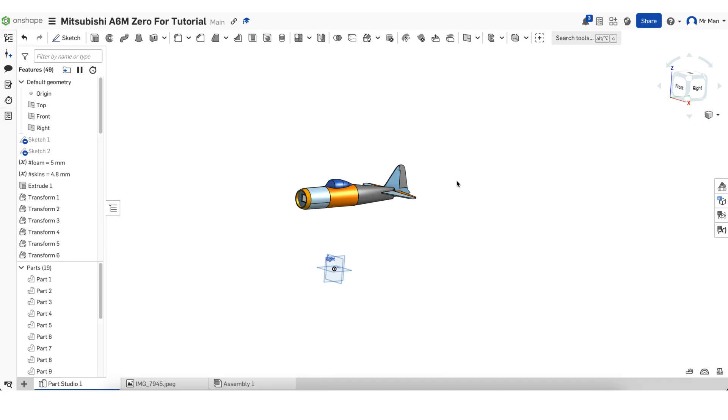Alright, so we're just going to start with that, make a sketch, choose the right plane, and start making the airfoil. We're just going to make a corner rectangle, and try to make the bottom plate of the skin, basically. That looks about right, 5 millimeters thick.

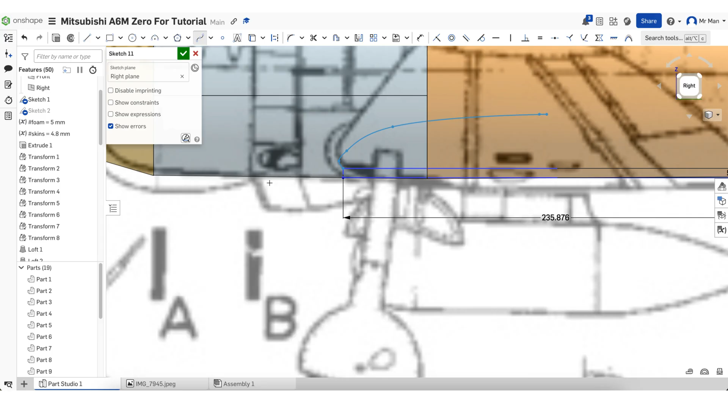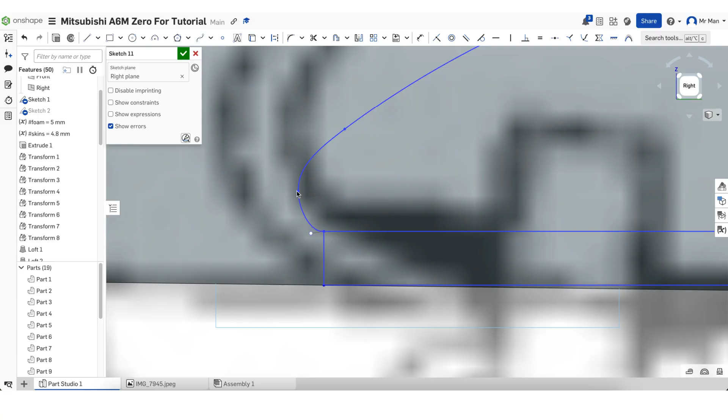And now we gotta start making the airfoil. When you drag it past, do not let it connect to the bottom plate we made. I'm just trying to get the overall shape, try to get a decent airfoil. It doesn't have to be perfect, but you want it to be close.

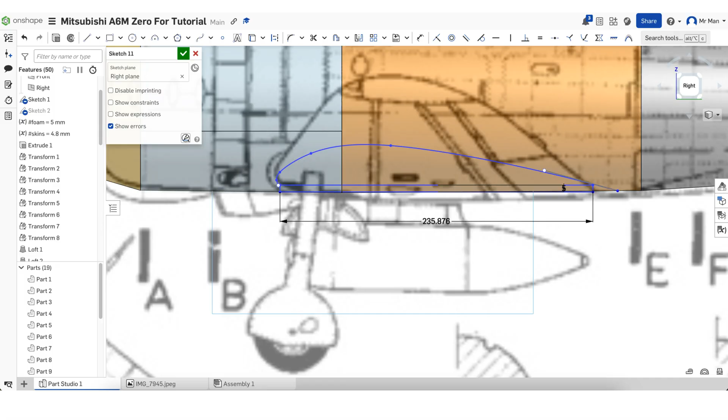Now we're going to make a construction line just to check how thick the airfoil is. That looks about good. Let's do an offset, bring it out 5 millimeters. Bam.

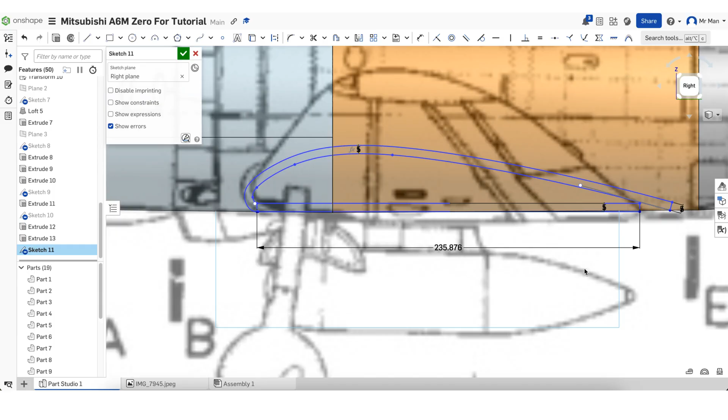Just gonna make a line and join up this back bit. There we go. Let's delete this line.

And try to join these because they're way off right now. Try to find any constraints and delete them. We want them to join, but we may have to just get them close and use a line to connect them.

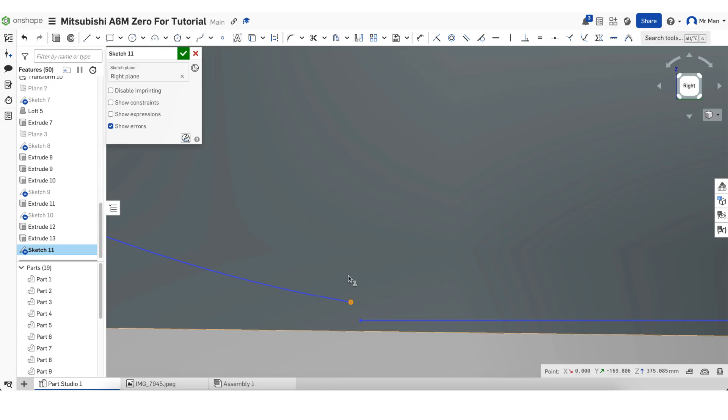I'm not an expert, I'm a human, so of course I make mistakes every now and then, but we're just going to join it with a line. Okay.

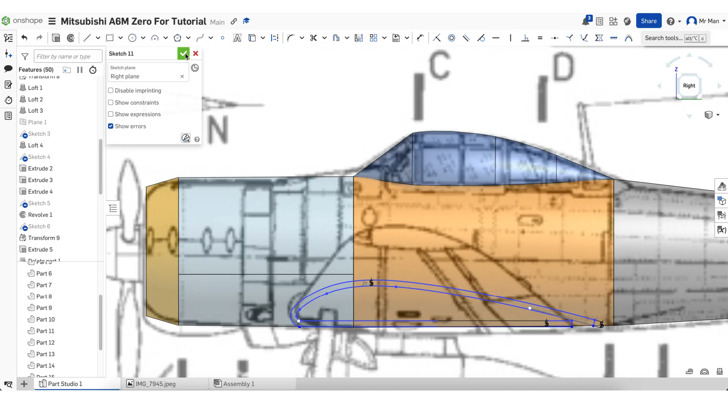Now we're going to make an offset plane. Choose the right plane. And now, since our wingspan is 1200, we're going to set this to 600 because that'd be half of the wing, and that's what we're doing right now.

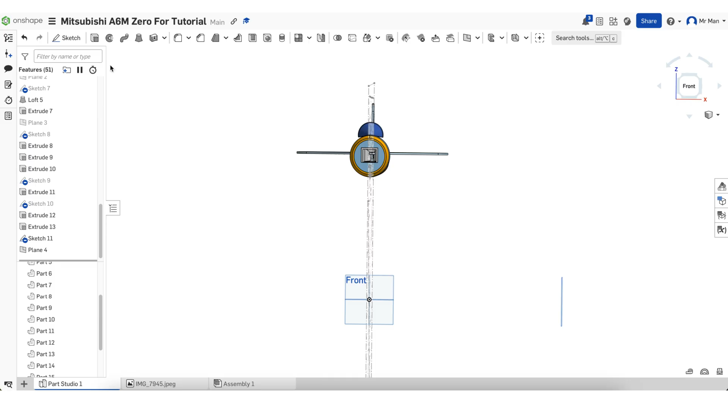We're going to try to grab all these lines, right click it, hit use. There, now we have this bit. So basically we have that sketch, but now on this plane that's 600 millimeters apart.

So we're going to select everything. We just want the main, because we're going to do an offset for the foam thickness. So we just want the internal structure basically, so it's the same airfoil throughout. Hit transform.

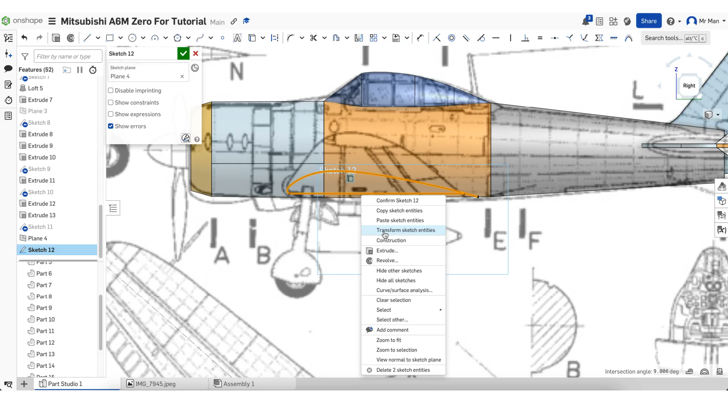And let's scale it down quite a bit. This is going to be for the wingtip. We're lofting from the wing root to the wingtip. That looks close. Hit offset.

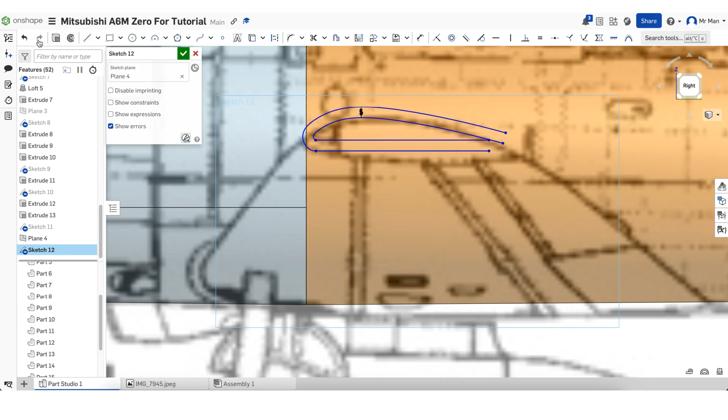Select the two lines, click and hit 5 millimeters. Perfect. Now let's grab the line tool and join the ends. Finish sketch. Perfect.

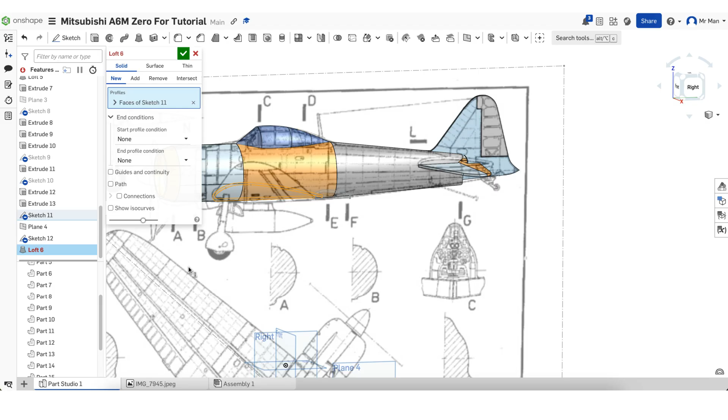Now let's go to the loft tool. Make sure it's in solid. Now choose the profiles, I'm just gonna hit sketch 11 to sketch 12. And it's giving us an error.

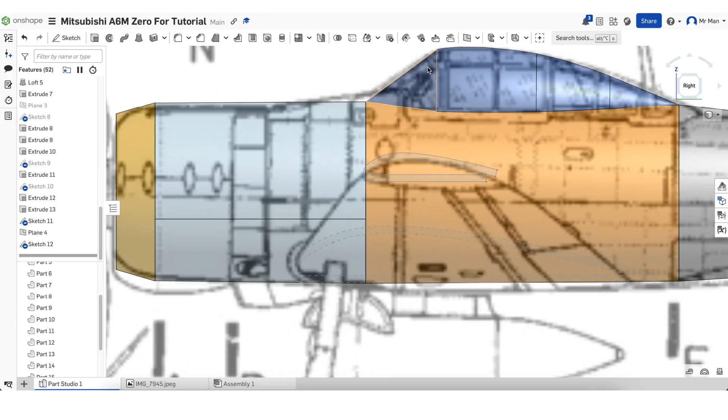I'm not 100% sure why it's failing, but let's just try again, change a couple things. Go to sketch 11, and let's do things a little differently this time.

So now we just got the main airfoil. Just try to delete that line. Okay, yeah, so now we've got the airfoil.

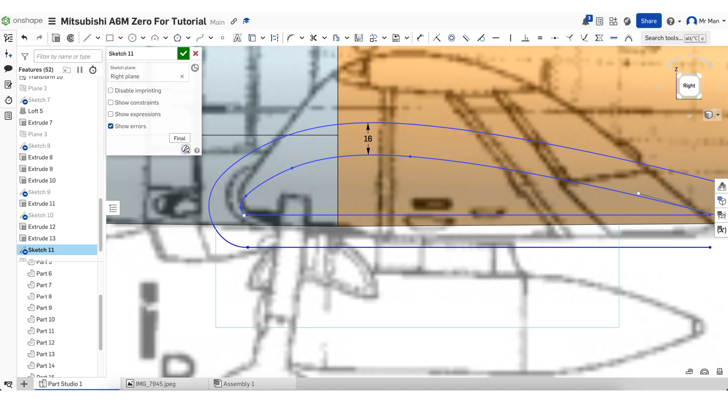I'm just going to offset the airfoil. Set it to 5. Just like that. Hit the line tool.

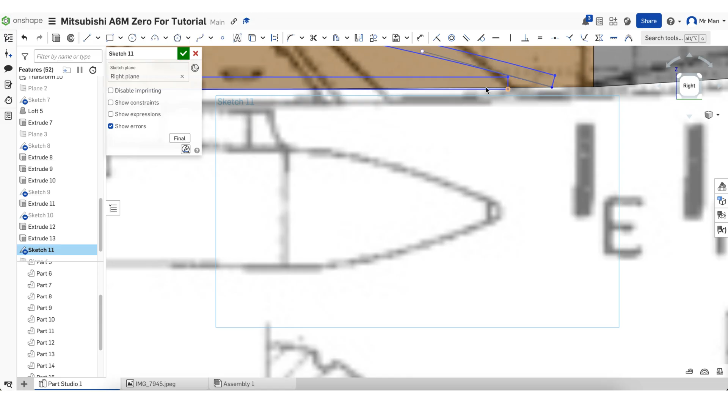And see if this will work better than it did last time. Alright, close that end. Perfect. Alright, let's see if this will work.

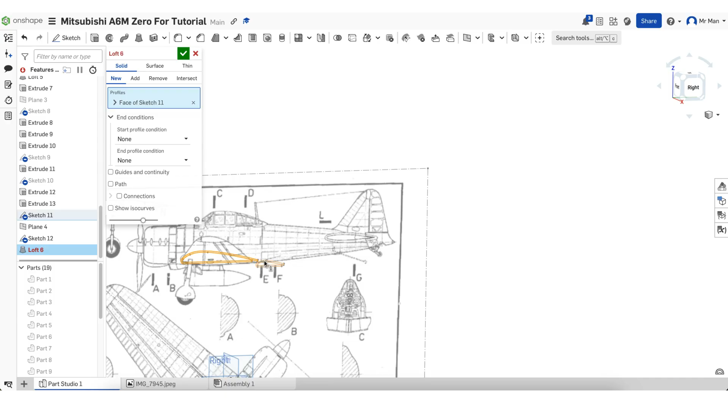Making sure that's all one solid body. Perfect. Let's loft again, make sure it's solid, and select the profiles. And there we go. This time it worked. It's perfect.

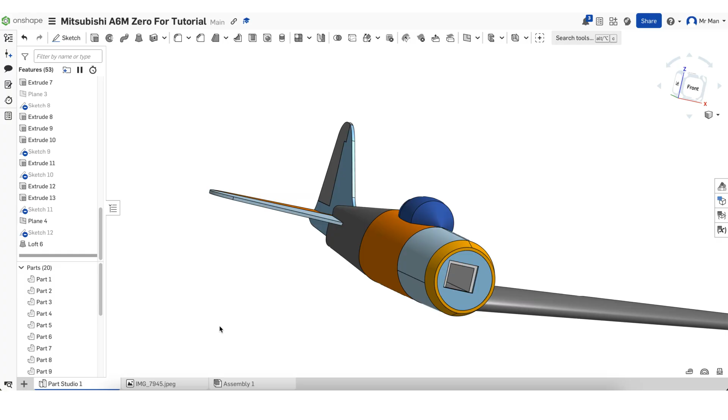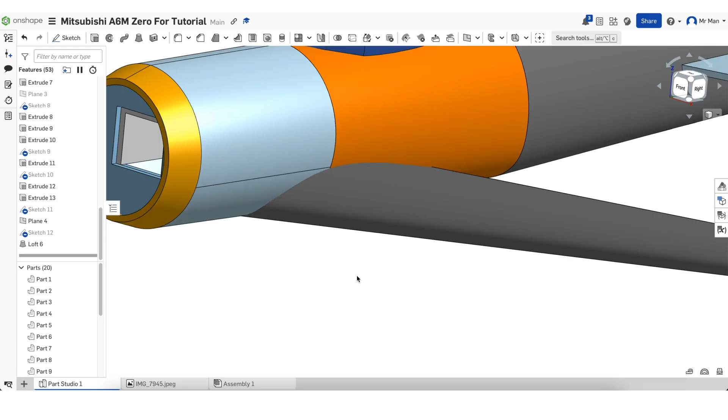And as you can see, now we have a wing half. That looks pretty good. Yeah, it looks really good.

You can see that's where the 45-degree bevels will be on that line. Okay, let's just bring back this top view sketch and let's check the wing and see how it looks.

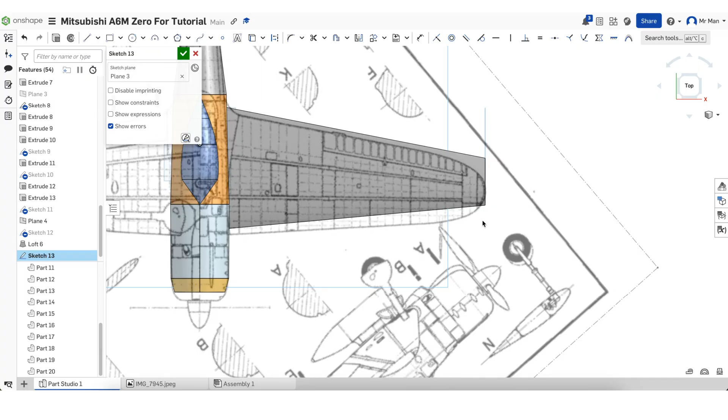Try to get the curved shape on the wingtip. As you can see, it's a little far back. I want to bring that tip forwards a little bit. It's like swept.

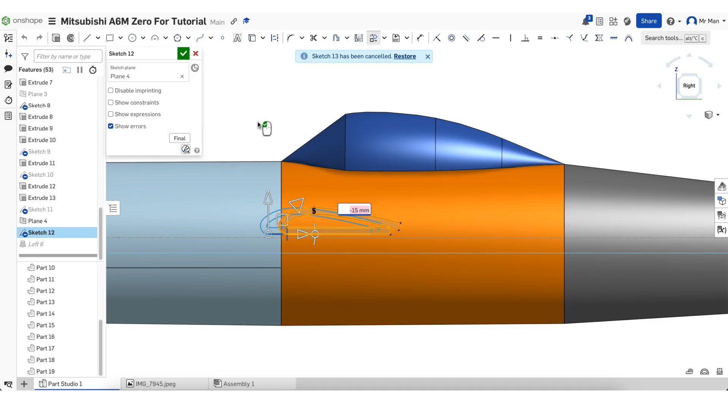Swept back too much, so we're just going to go into sketch 12. Hit transform and move it forward a little bit. Perfect. Alright, let's see how that looks.

Let's go to top view, and there. It's not perfect, but it's much better. Not anything you'd really notice when building with foam or anything like that. So that'll work. You can do sketch.

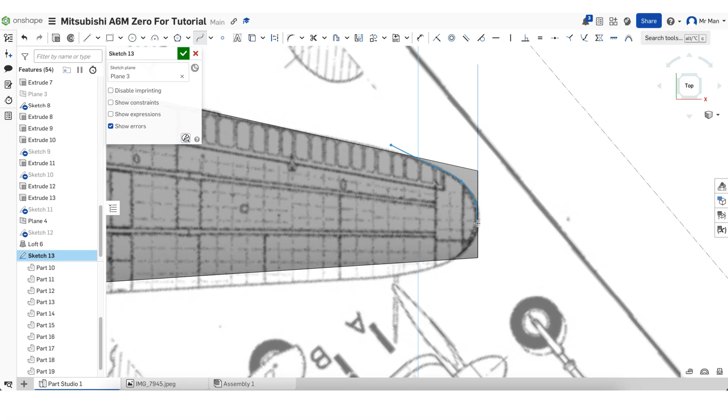Let's choose spline, and let's cut the wing to give it this rounded wingtip instead of a straight wingtip like it's got right now. Just work our way all the way around, using the canvas as a guide. Choose line, and just go around it to close it off. Perfect.

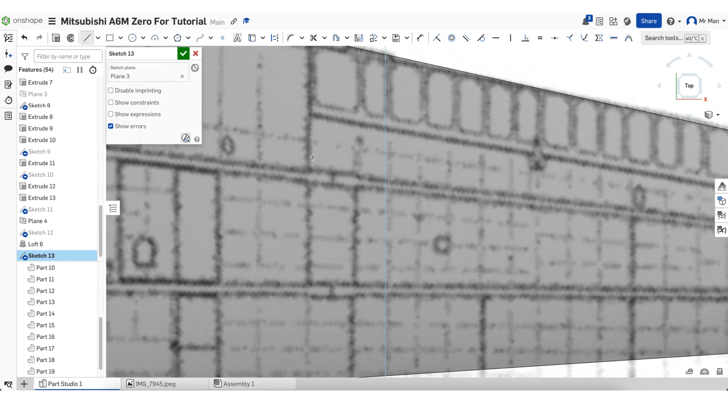Alright, now grab the line tool. Let's start making an aileron. Once again, using the canvas as a baseline for reference. And just carry it to the edge of that, and that'll work. Alright, finish sketch.

And let's go ahead and hide this canvas. Okay, now let's extrude, and then let's start with this wingtip. Symmetric. Remove.

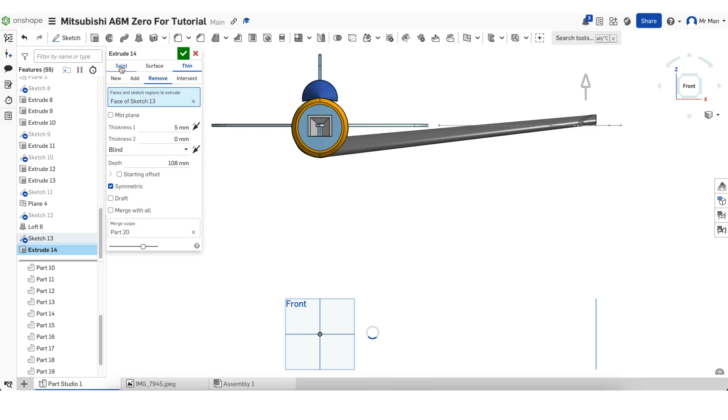And we're on thin, we need to change it to solid. Make sure you're on solid. Alright, let's reselect that. And that looks pretty good. As you can see, it cuts it to a rounded wingtip.

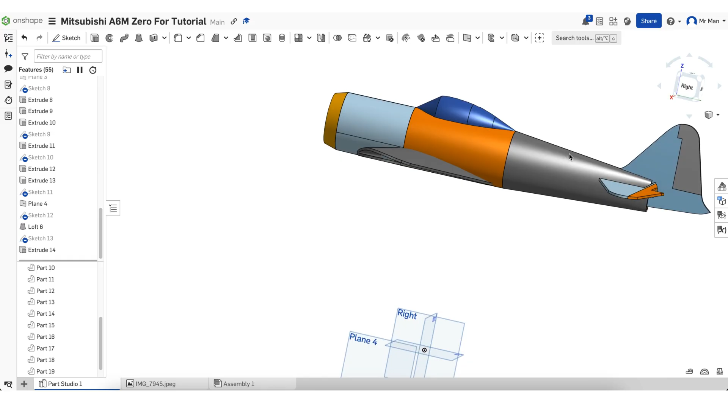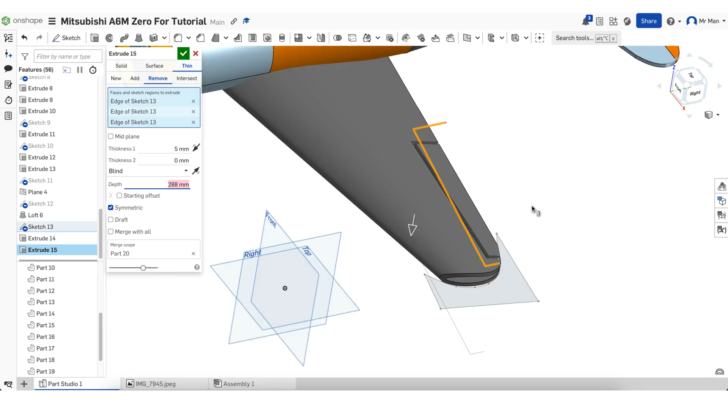Now I'm going to bring that sketch back, hit extrude, make sure we're in thin, and select these lines we made for cutting out the aileron. Make sure it's in remove, symmetric, make sure it cuts all the way through, and then let's choose thickness to be 0.01.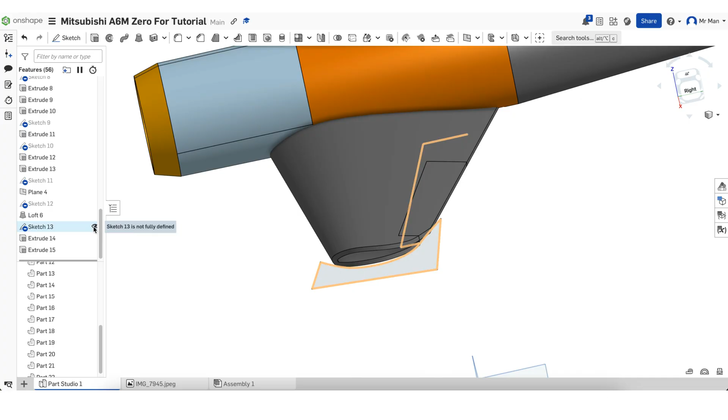Perfect, okay, now we've got our aileron. We can hide that sketch now. Let's go to the bottom and delete this little piece right here because we do not need it, because the aileron is one single piece of foam. It's not double layered, just single layered.

Okay, we're going to try to cut the bottom. Great, well, just a tiny amount of undercamber. It's not necessary, it makes it easier to build, and it flies a little gentler. Now let's just pick the top plane.

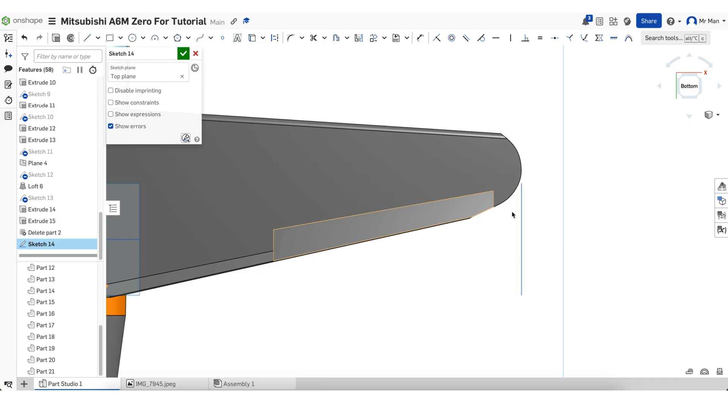Just hide plane 4, make it easier. And let's grab a line and let's just cut it off right at the edge of the aileron. Just make a line and drag the box around it.

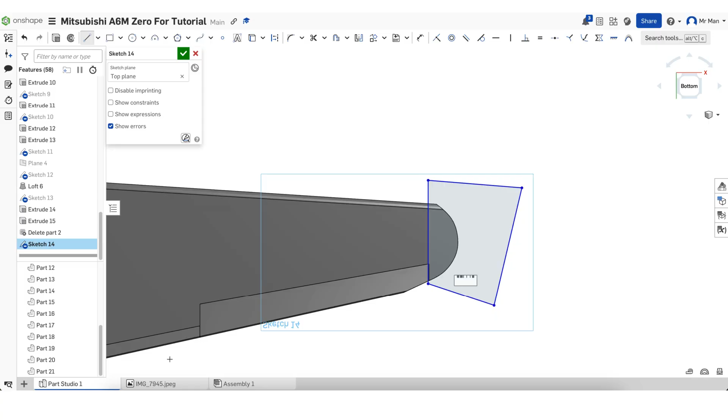Now we'll cut this bit out right here. That way the aileron has more room. When you fold it over, it's not gonna be the same every time, so you want a little bit of buffer, so to speak, and that's what we're making right now. It's that buffer.

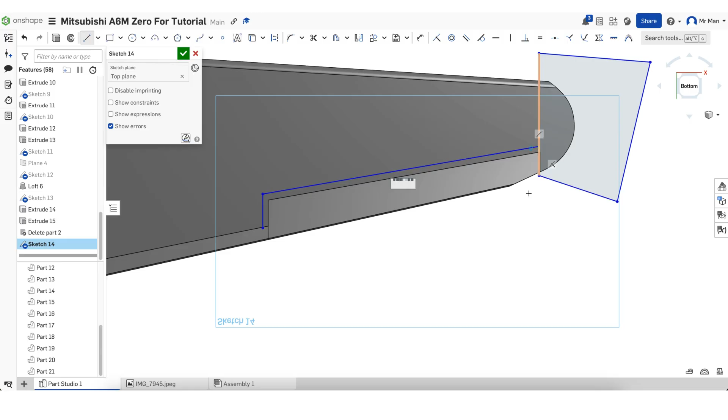Just connect it there. You don't need to make it fancy. You could just draw the line straight over, but I'm just gonna make it like an L shape. Go, finish sketch, hit extrude.

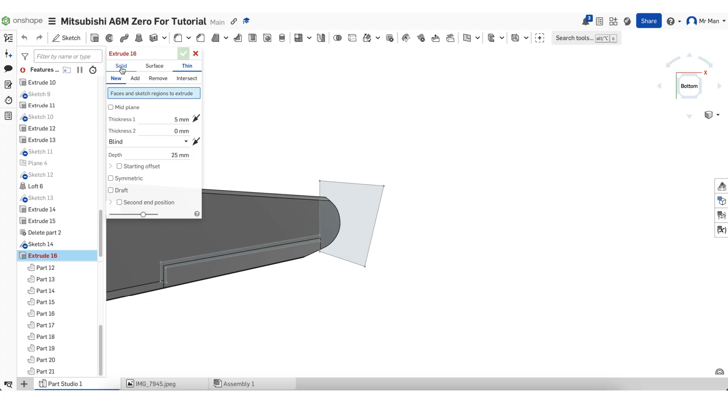Click solid, and choose this, the part for cutting out the undercamber. Hit remove and bring it up. Let's select a merge scope.

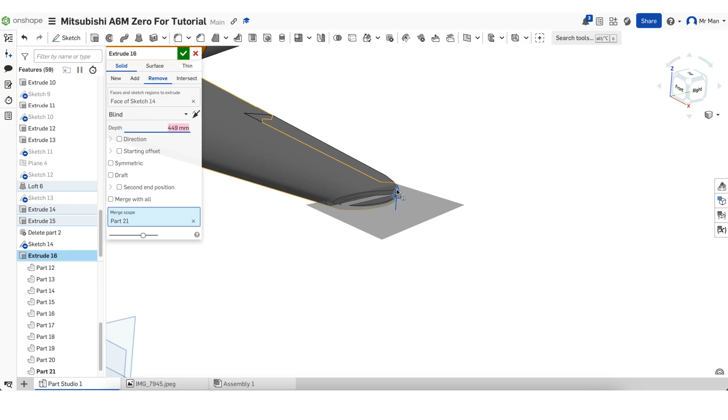Okay, now let's bring it down because we still want the top to have the full rounded wingtip. We just want to cut out the bottom. A little more up. Okay, there, that looks good.

Now you see we got that little piece still hanging off, so we can just go to delete part, select that little floating piece. Okay, gone. As you can see there, we have an undercambered wingtip.

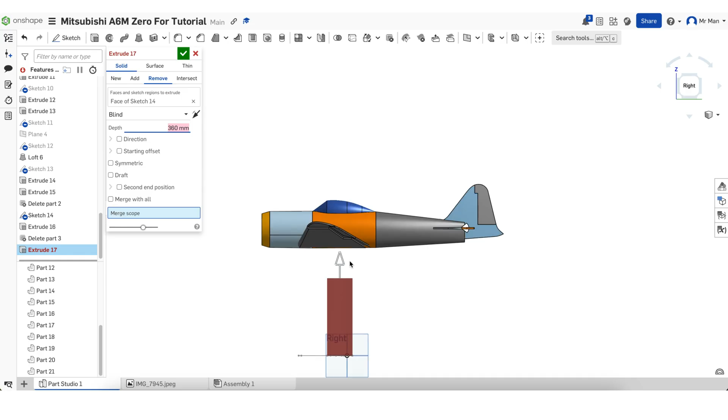Go to extrude, let's bring that sketch back. Now let's select that L piece. Oop, forgot to hit remove. Select our merge scope. Bring it down until it stops.

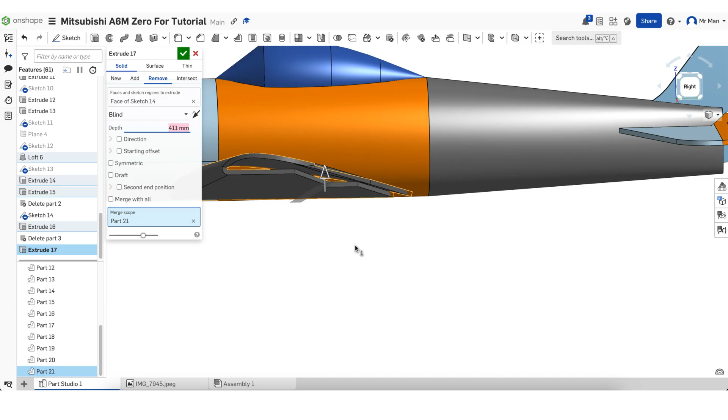See, we got a problem. It only cuts part way because of the dihedral, it's at an angle. So we're just gonna X that out because we can always go back in 2D after we're done designing this plane and cut that out. It'll be just fine. It's pretty simple to do, and it's not 100% necessary either.

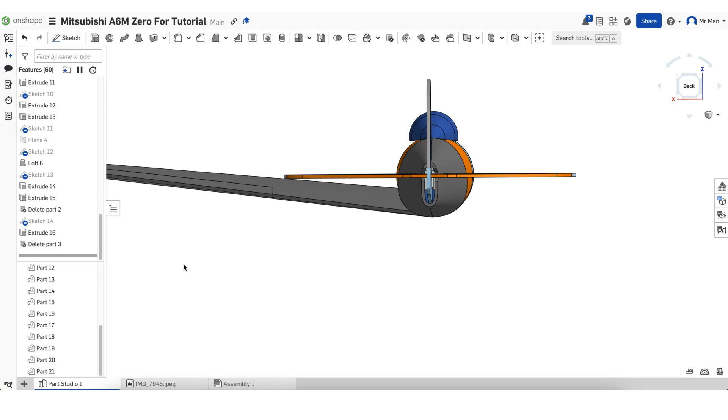Alright, that's looking pretty good. It's looking very good. Now we need to make, yeah, that looks good.

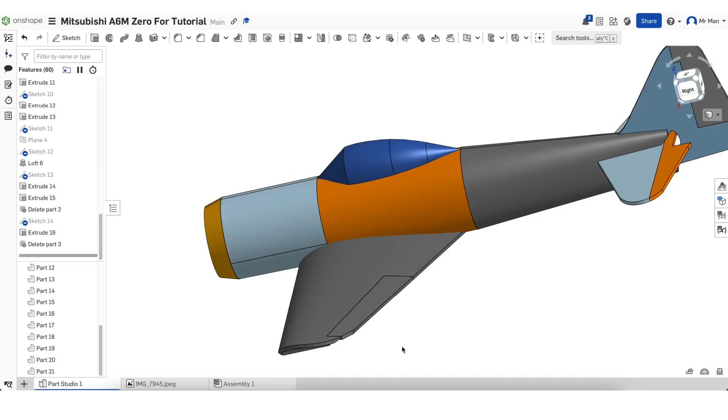Okay, let's just mirror the other side so you can get an idea of what it looks like. Select the aileron and the main wing body. Select a mirror plane, in this case it's the right plane. And boom, there we go. We got the whole wing.

That looks pretty good. As you can see, it follows the path of a normal A6M Zero wing pretty well. Looks pretty scale.

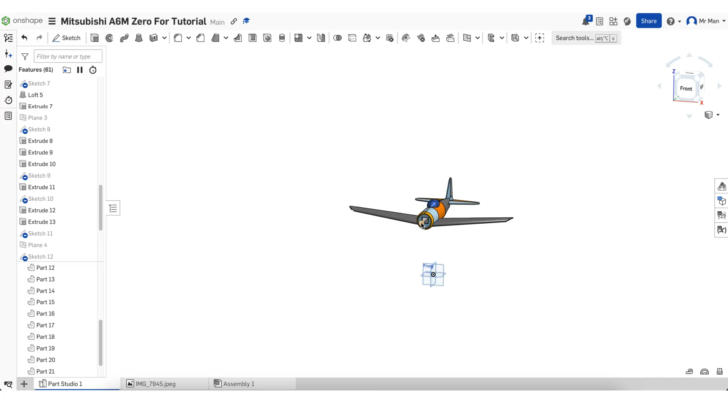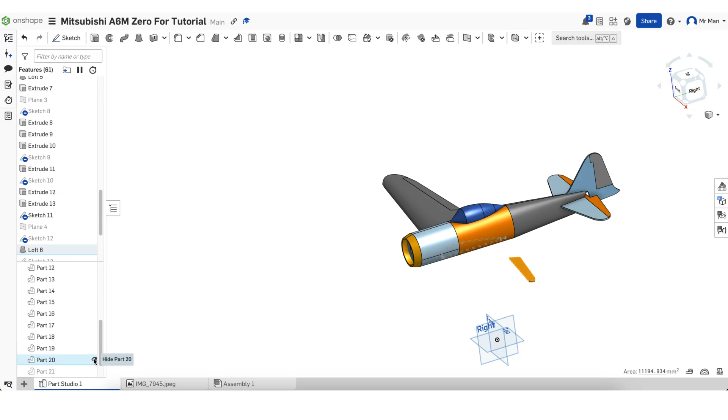Let's hide this piece, and let's bring back sketch 11. Alright, let's hide the wing. Make a new sketch, choose the right plane. And let's select the outside curve. Hit use, and do the same with the bottom line.

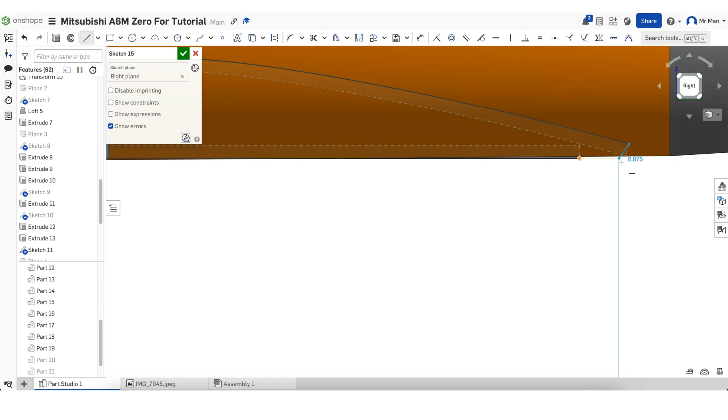Perfect. So now we gotta join it all together, so let's just make a line. We want to make it parallel. Alright, perfect, drag it over.

There, now it's one solid piece. Finish sketch. And let's go hide sketch 11 and let's, whoop, not sketch, extrude, and extrude sketch 15.

Make sure it's in solid, hit remove, symmetric. Let's drag it out, and let's select our merge scope. Yeah, that looks right enough. Alright.

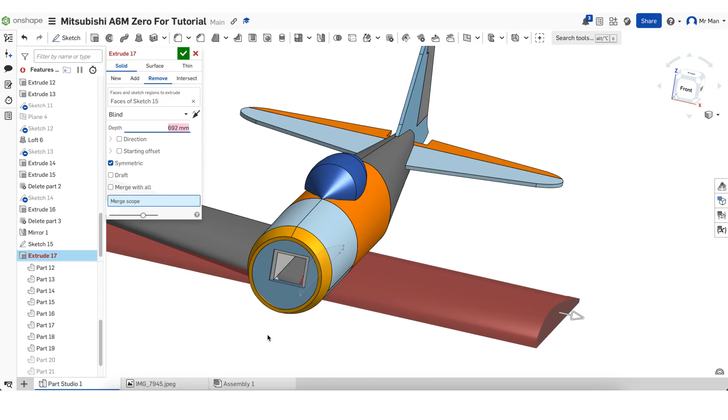Not that skin, but this skin and the hatch skin. Perfect, comes out on both sides. Finish sketch.

Okay, now we will want to delete these bottom pieces because we won't want them. Let's delete that one, the other one is still joined. We got to go fix that. But first, let's...

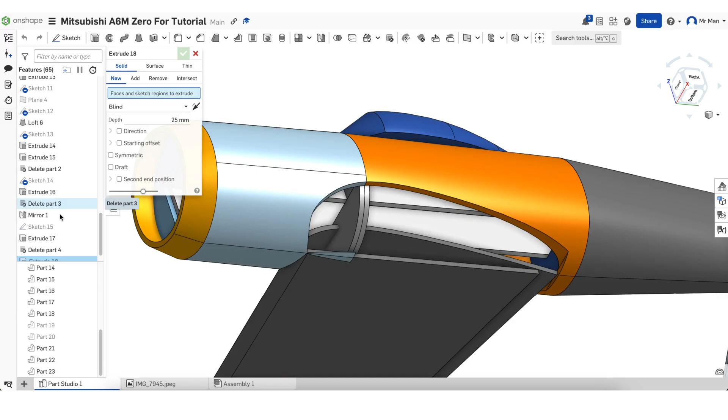Cut out these formers. Same sketch, hit remove, pull it out, and select a merge scope, which we want to be both of these formers. Alright, finish extrude, and there we go.

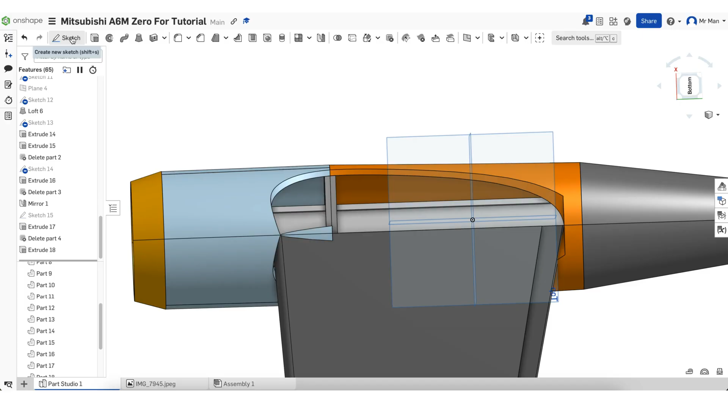Alright, let's make a sketch. Choose the top plane, and let's just make a little line. Just hide, just bring the other wing back, and let's zoom in on this.

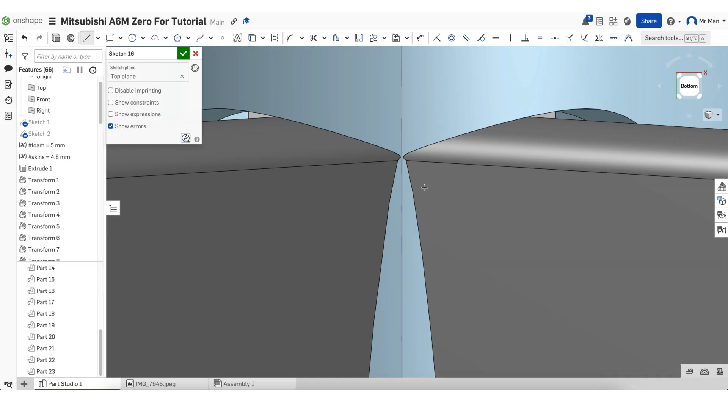So we just want to cut it basically, so we're just going to make a line, bring it across. Again, that's perfect, just make sure it's perfectly horizontal. Finish sketch, hit extrude, make sure it's on thin, and select that line.

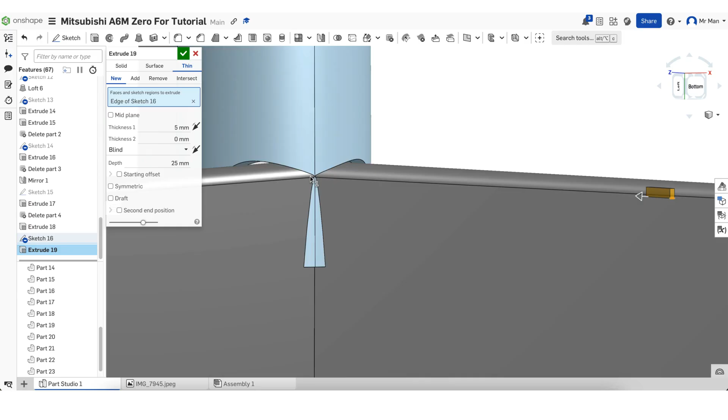Now it is 5mm thick. That's why it looks like it's extruding in the wrong direction. Let's set the thickness to 0.01. Make sure it's on remove.

And bring it up. Looks pretty good, that'll work. Now select our merge scope. And it's cutting right through that little line right there.

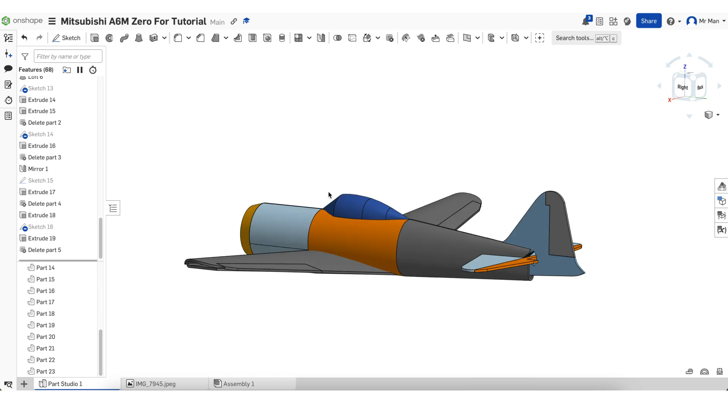Perfect, now we're going to delete part and select this piece. Bingo. So now we've got the slot basically - not really a slot, but now the wing will fit in. It's formed to the shape of the wing is what I meant by that. That's nice, so the wing.

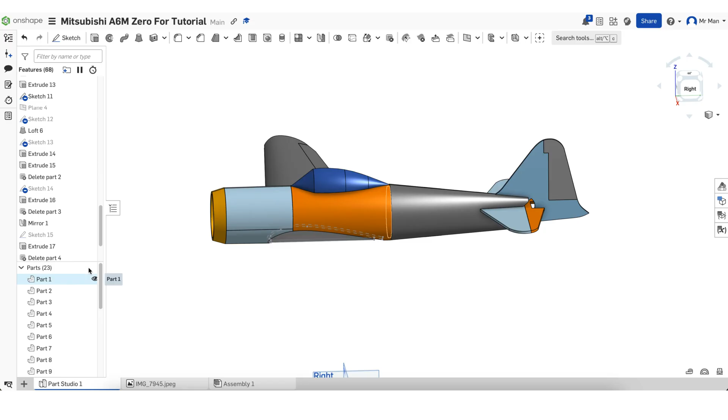Let's bring back sketch 12, and let's bring back sketch 11 first. Make a new sketch. Just hide all the whole plane, it'll make a whole lot easier to work with. Alright, make a new sketch.

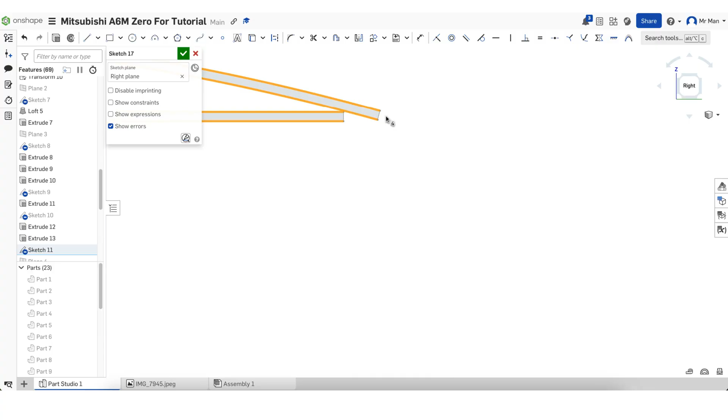Alright, for some reason that doesn't work. Let's just select all the lines. We don't need those, we're just using this for reference. So, use. Perfect, now let's make

A corner rectangle. Let's bring it close to the highest point. Bring it down to the bottom. And let's change this dimension to 5mm. Just like that.

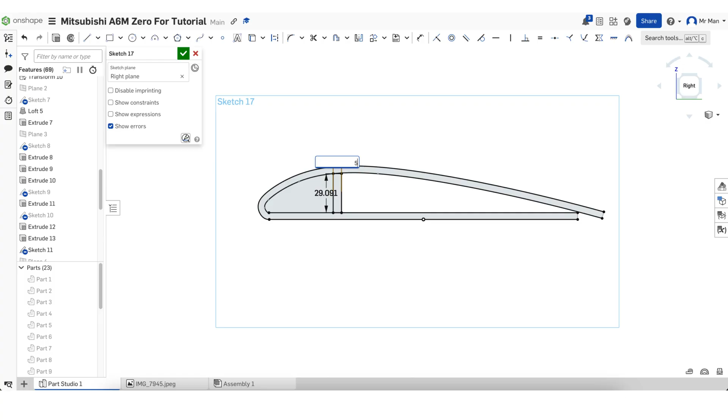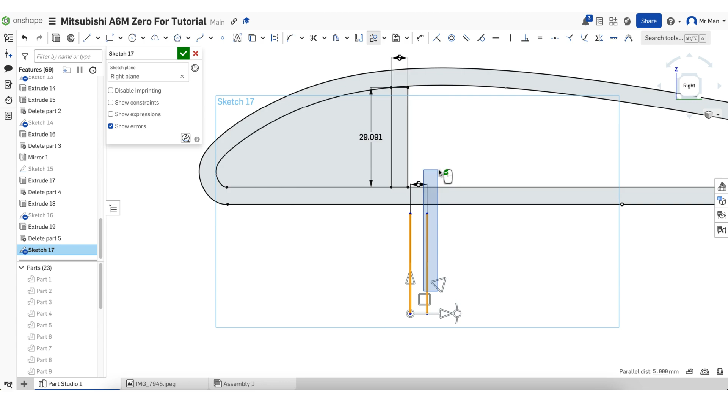We can't select the bottom line because it's basically part of the main sketch, so we're just going to copy, paste, and there we go. Now I've got these two. Let's drag it over until it snaps. Okay, now let's grab a line and join the top. Perfect.

And we're going to loft. We're making the spar right now, if I forgot to mention earlier. We're making the spar - foam spar would probably be plenty strong, but we can always add plywood reinforcement if we need it.

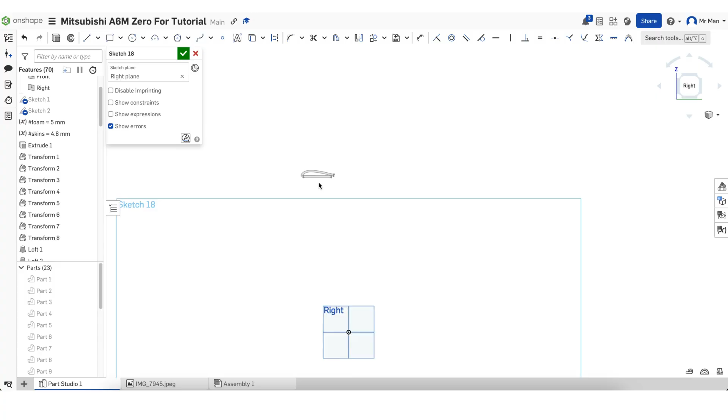Okay, let's hide that sketch, and hide sketch 11, bring back sketch 12. Make a sketch. Once again, select all pieces, all the lines and splines. You hit use, and we'll do the same thing that we did with the other part.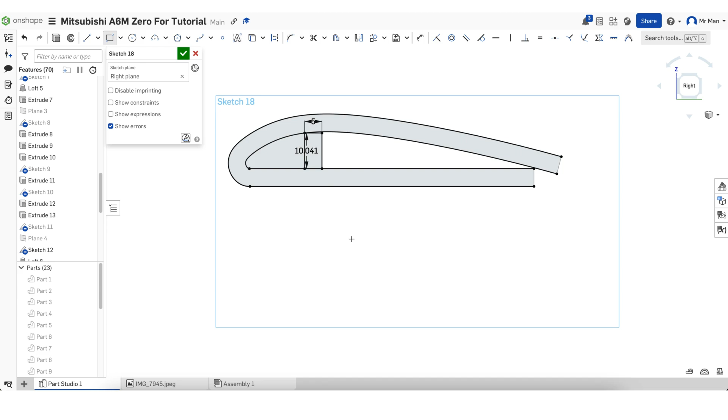Basically the highest point, nearly. We want it close because it's a double spar, double thickness. We can always go triple thickness if we want, but we can always do that in 2D in Inkscape, whatever you're using.

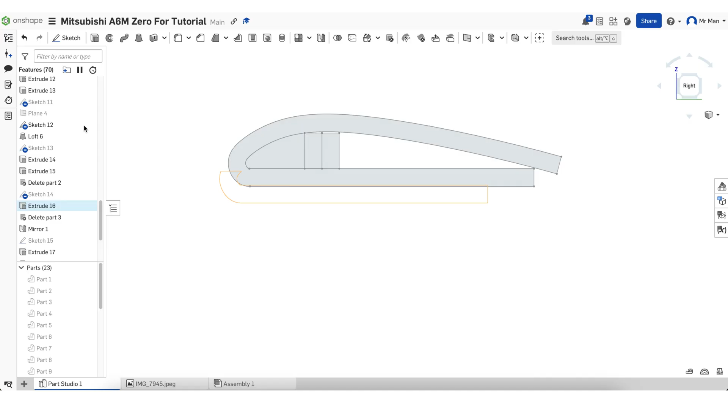Okay, we're just doing the same thing - bring the line over the top. Bingo, alright, finish sketch. Bring back, let's bring back sketch 17. Perfect, now let's go to loft.

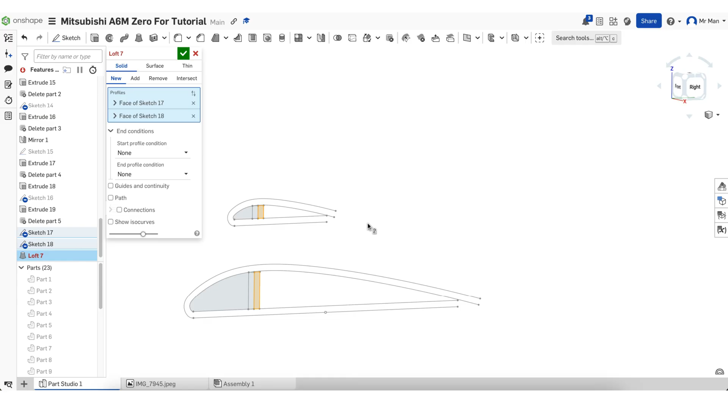Solid. Let's select the two right sides, and we've got an error showing up: cannot determine loft direction. Oh, that's my bad, I put it on the wrong plane. Put sketch 18 on the wrong plane, so it's going to double click sketch 18. Delete the right plane, we don't want to use that.

And let's select the plane we made earlier, we just got to find it. Plane 4 - and I passed it, there it is, plane 4. And there we go, and now what it did is it brought it out 600 millimeters, so now it knows which direction the loft goes. And there you go.

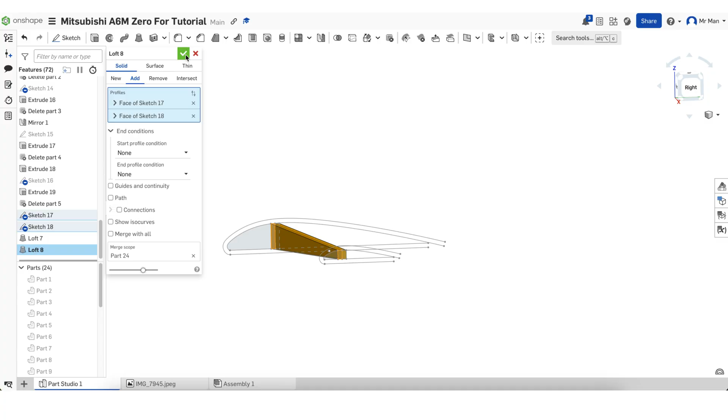That's perfect, let's do that again. Bring back sketch 18, choose that rectangle. Bam. Hide the sketches.

That's pretty good. Let's redo loft 8 and make sure it's on new this time instead of add, we want it's 2 pieces from, not 1. And there you go, now as you can see, it extends way far out on the wingtip.

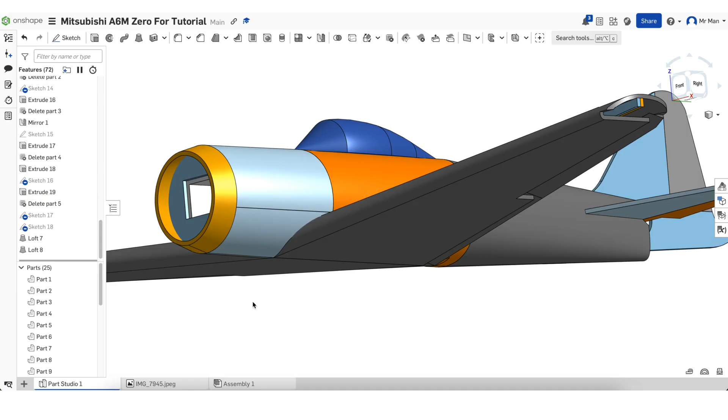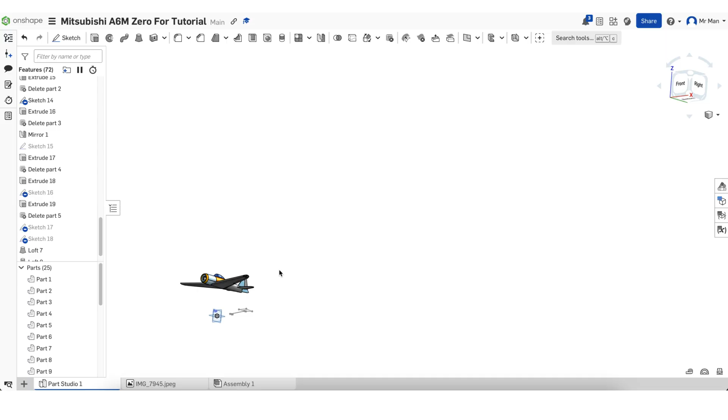So what we're gonna do is bring back that other sketch. Alright, okay, so let's bring back that sketch we used to set the under camber - sketch 14. Hit extrude.

And we're on thin again, we gotta set it to solid. Select that, make sure it's on remove. And let's just cut straight through the formers.

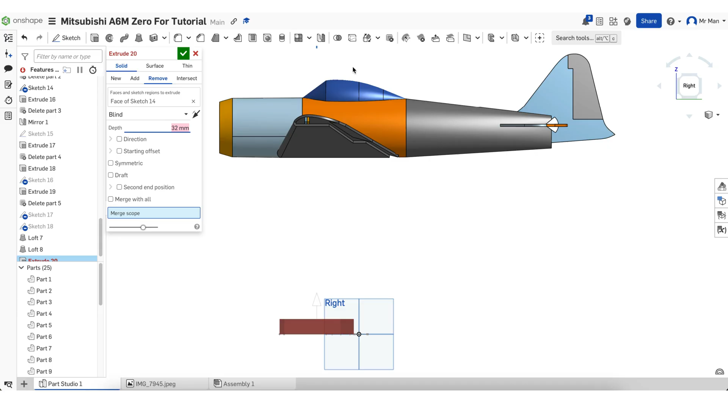Set our merge scope to these two, not formers before - the spars, sorry. Alright, set mirror. Select the spars, hit mirror plane and choose the right plane. Alright.

And now we've got spars on both sides. As you can see, there's our spars. It's looking pretty good.

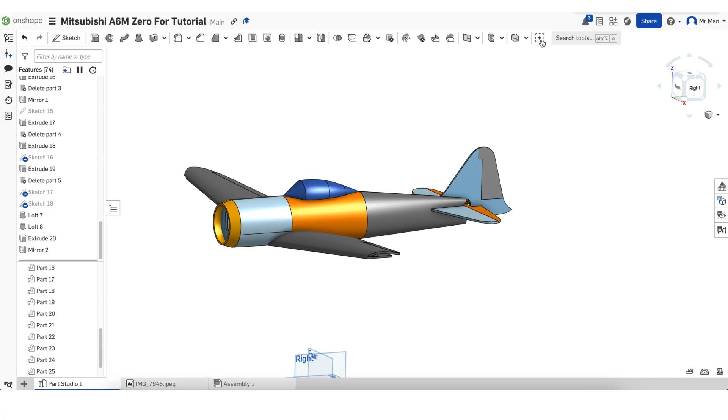Okay, now I'm going to talk about servo location. Now on the wing, we'll cut that out in 2D, just because I'm too lazy to do it right now. We could do that in 3D, but I don't want to.

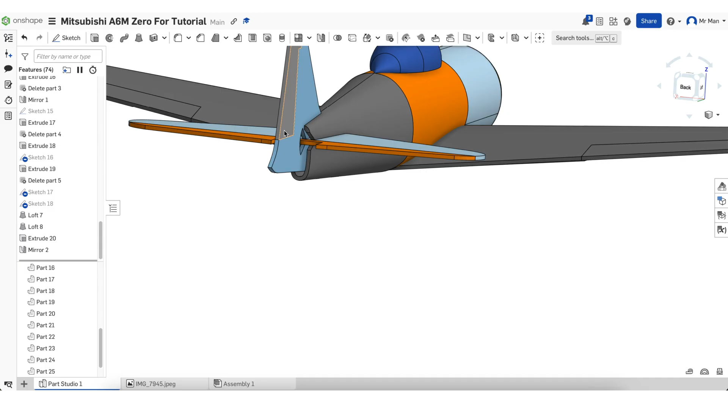Now as far as for the back, for the elevator and rudder, they're just gonna sit right in the center pod. As you can see, the rudder line will go in between that gap, the control rod. For the elevator, it'll go through the bottom.

Right, let's just hide the skin to make it easier to see. So we'll probably just cut a hole in the top of the center pod for the rudder, and the elevator will just sit in the bottom.

Perfect, now let's just hide all these for aesthetics, because we are about done - we won't need them anymore.

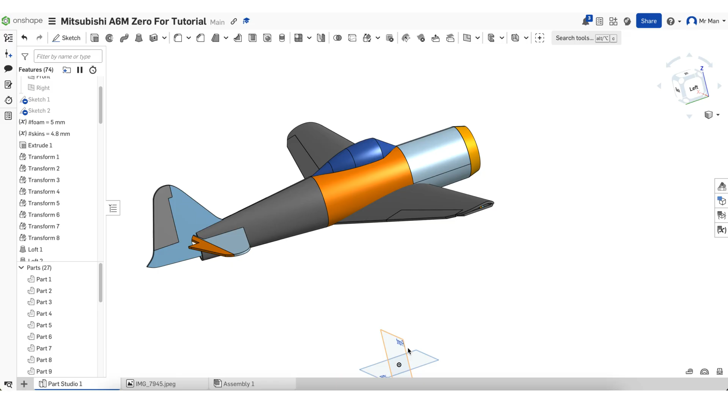Yep, that's it. And that is how you design Master Series FoamBoard RC airplanes in Onshape.